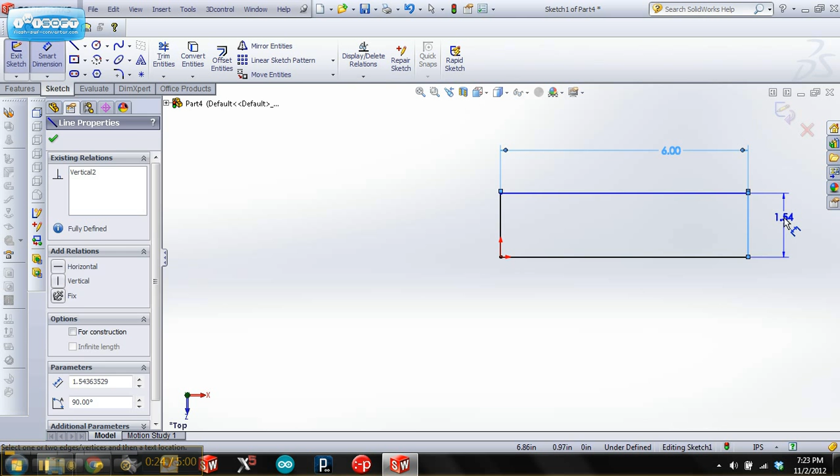Let's make it a 6-inch cube. We'll go 6 inches by Smart Dimension, hit enter, and then again set the height to 6 inches by Smart Dimension and hit enter. Let's zoom in, fix this thing in place, and you'll see it's just a 2D cube.

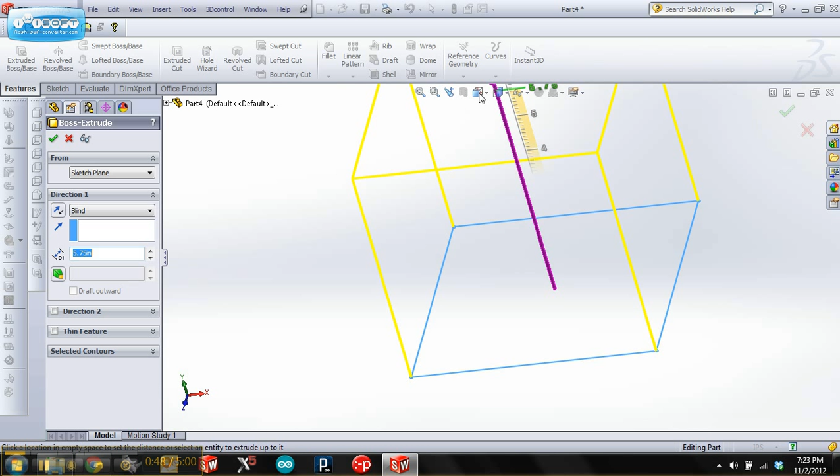We hit the check mark on Smart Dimension, and now we're done drawing it, so we'll hit exit sketch, then drop over to features and click on extruded boss and base. We can drag this up to set the dimension, or just type in a physical dimension. We want it to be 6 inches, from the sketch plane, blind, in the upward direction. Now we'll hit the check mark, and there's our cube.

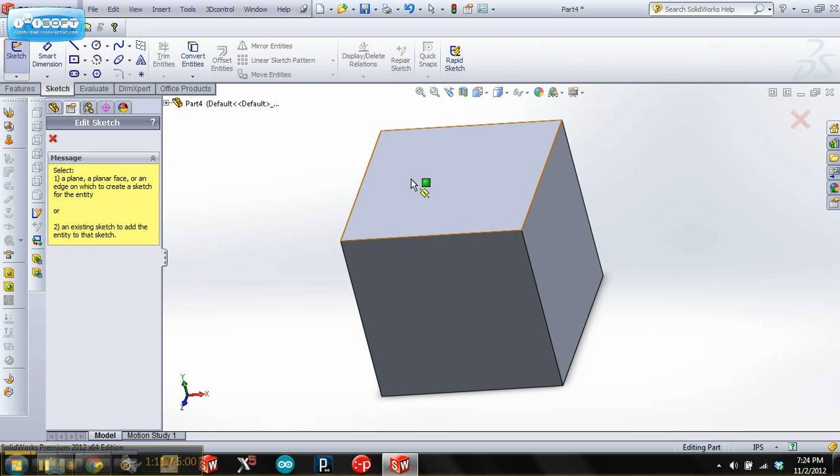Let's go ahead and draw some holes in this cube. Again, we'll go sketch, and select the plane or surface that we want to sketch on. Select the hole and draw that hole. Now we need to dimension that hole's location.

So we'll say it's 3 inches from that edge, and then 3 inches from this edge. Nope, that's not working. Go Smart Dimension, select this edge, and go 3 inches. There we go, 3 inches.

Now we also want it to be 3 inches in diameter. You know what, let's make it 3.5 inches in diameter. Hit Smart Dimension and hit exit sketch.

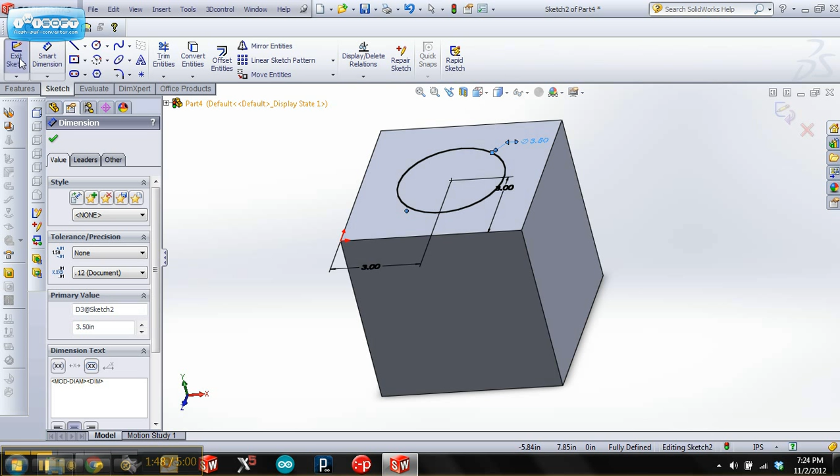Now we want this hole to go all the way through, so we're going to hit extruded cut, and instead of blind we'll hit through all. Notice that it's at that surface down here. Hit OK, and there it is.

There's our hole. Now let's go ahead and do the other two edges. We'll select that, select this, go boom boom. Now we're going to say 3 inches.

And if we didn't want it to be 3 inches, that went 2 inches. We want 3 — double click on that dimension to pop it up again, and then retype the dimension you want. There's another 3 inches, and we did 3.5 on the hole diameter, then we'll hit the check mark.

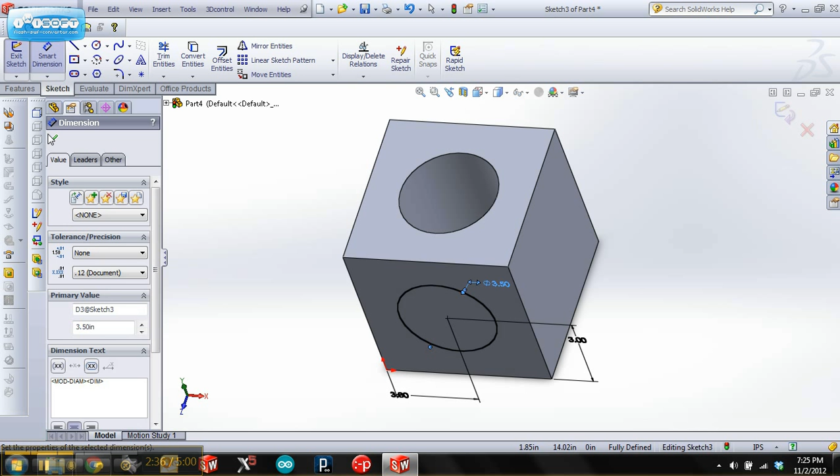Hit exit sketch, go back over here, extruded cut, blind — nope, let's make it through all, and let's go ahead and hit that. It went all the way through.

We have one more face to do. So again, we could also do it from here. We hit extruded cut, select the face that we want, and then start drawing.

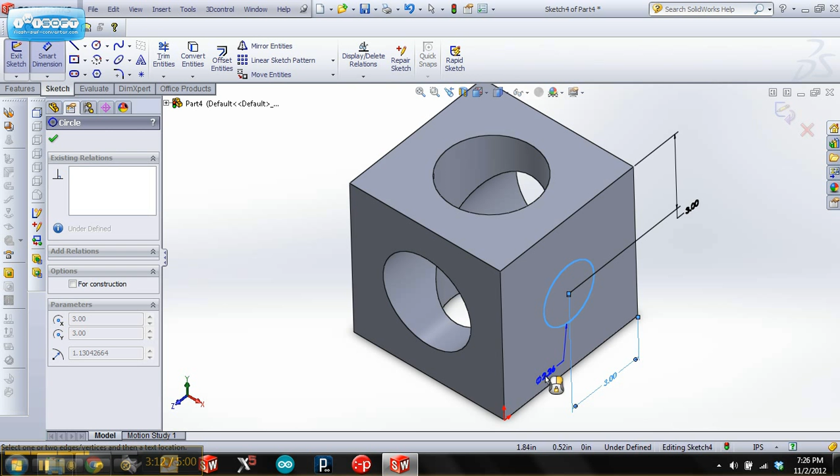So 3 inches, 3 inches, and 3.5 inches, 3.5, boom. And it automatically brings us back into the extruded menu, and again we want to tell it through all and hit OK.

So now we have a part, it's got holes all the way through it. Let's say we wanted to put some bolts in this, and typically when you put bolts in, you like to have a chamfer around the hole.

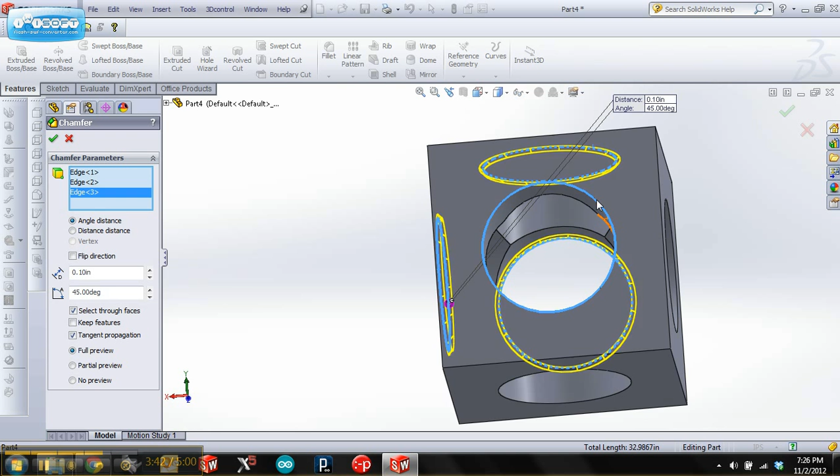So we'll select all the holes, grab the chamfer, grab the chamfer, grab the chamfer. Let's make that a 0.1 inch chamfer, and at 45 degrees, and there it is.

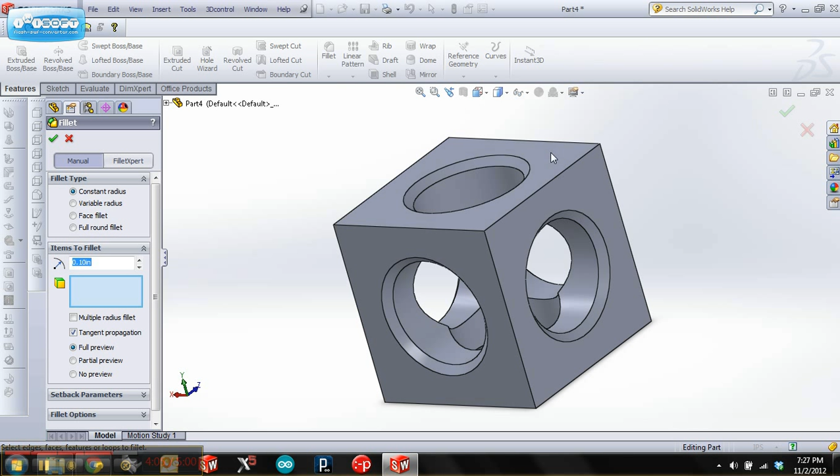So let's also go ahead and fillet all the outside edges. I can either select individual edges, or I can select the whole face. Let's go ahead and select the whole faces — that's easier, so we make sure we don't miss out on a face. Pan around it, let's make sure, okay. And let's call that a 1/4 inch radius on the fillet, and hit OK.

We'll go back to our normal isometric view, and there's our cube with holes in it, chamfers, and fillets.